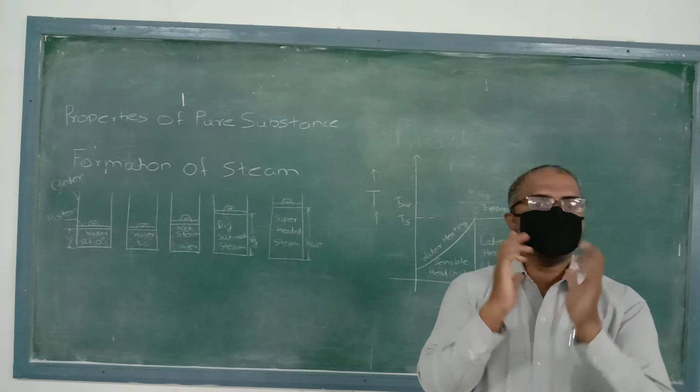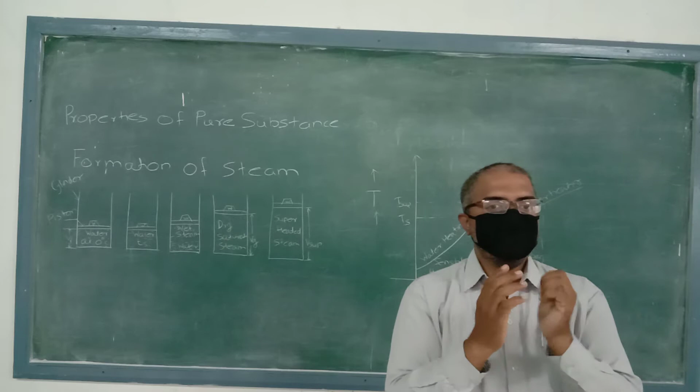First of all, we are going to discuss what is meant by pure substance. Pure substance means it is a substance which is homogeneous in composition, homogeneous in chemical aggregation, and invariable in chemical aggregation. It does not change whenever there is some variation occurred; the chemical composition remains the same.

Now, homogeneous in composition means what? It means that the composition at each part of the system is same as the composition of earlier one.

Homogeneous in chemical aggregation means that the chemical elements must be combined chemically in the same way in all parts of the system.

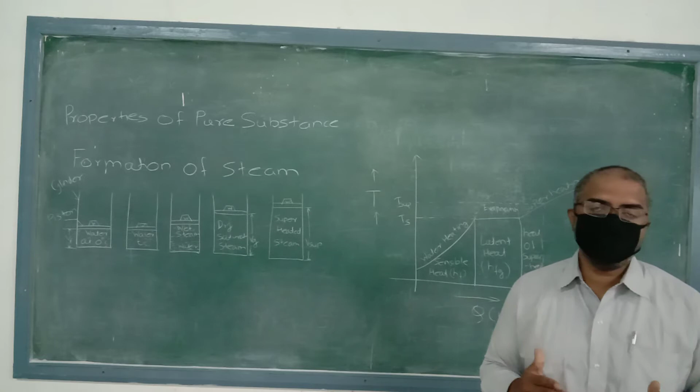Invariable in chemical aggregation means that the state of chemical combination of the system does not change with respect to time. So, three important aspects: homogeneous in composition, homogeneous in chemical aggregation, and invariable in chemical aggregation. These three are the important properties of the pure substance.

So, once again I am repeating: a pure substance is a system which is homogeneous in composition, homogeneous in chemical aggregation, and invariable in chemical aggregation.

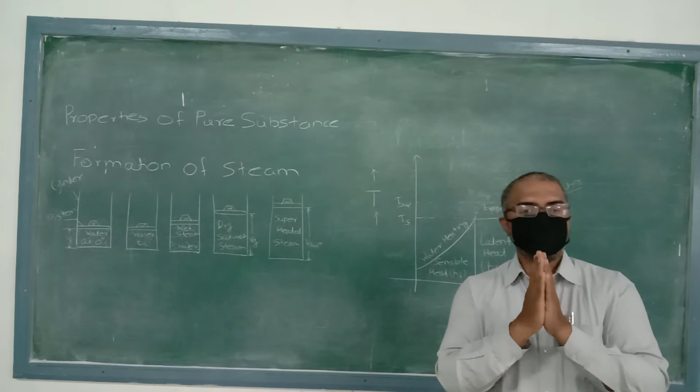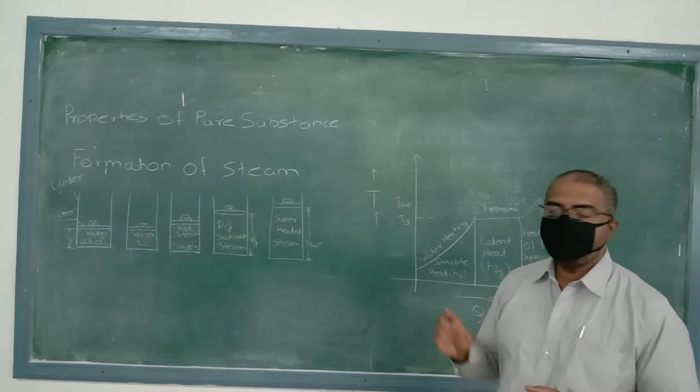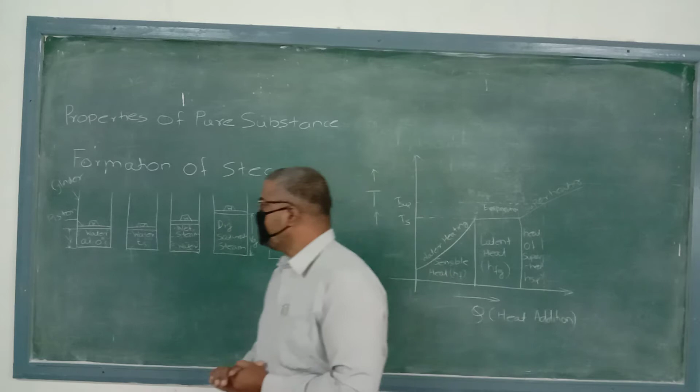Now, next we are going to discuss formation of steam. For this, we are considering the piston cylinder arrangement where the piston is freely moved in upward and downward direction. For this piston cylinder arrangement, we have plotted some diagrams.

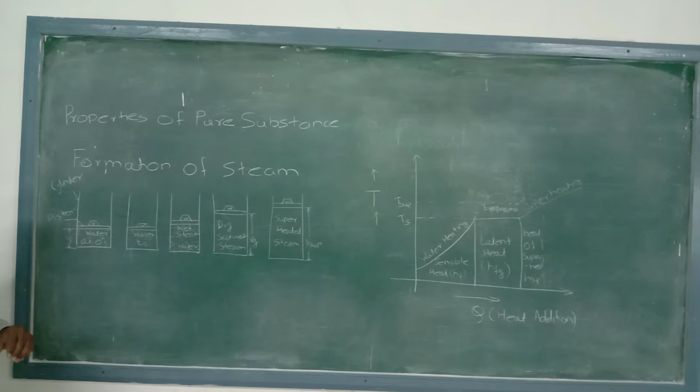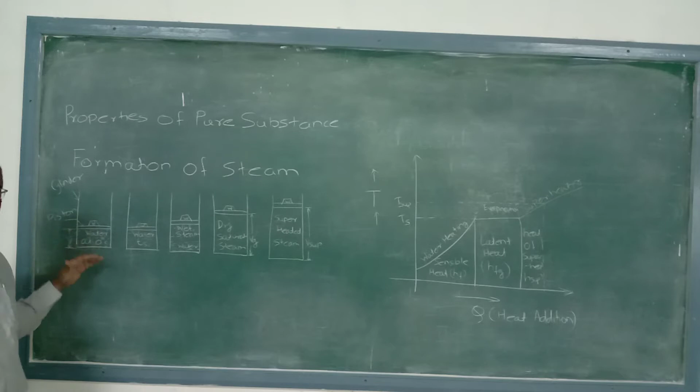In this diagram, we are considering one piston cylinder arrangement where the piston is moving freely in upward and downward direction, and some weight is put on that piston cylinder arrangement. Initially, below that piston there is some amount of water present whose volume is Vf.

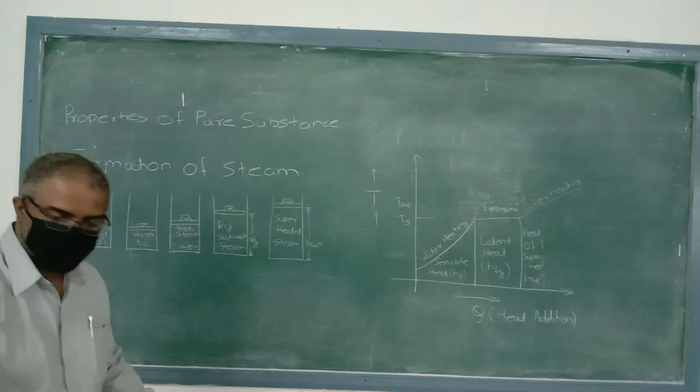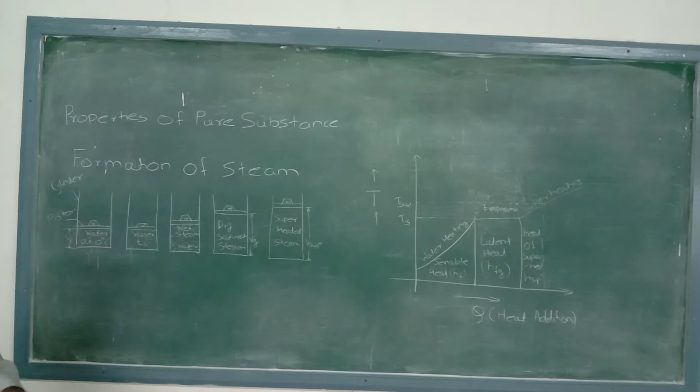Now, we are supplying heat to this water. The water will absorb heat up to 100 degrees Celsius. Due to the absorption of heat, the temperature is moving towards Ts, and this Ts is the saturation temperature of that water.

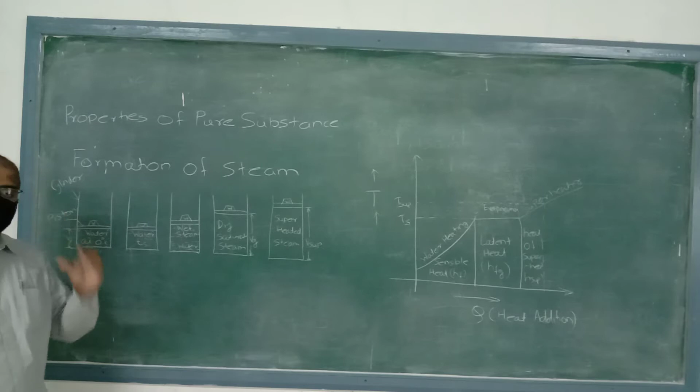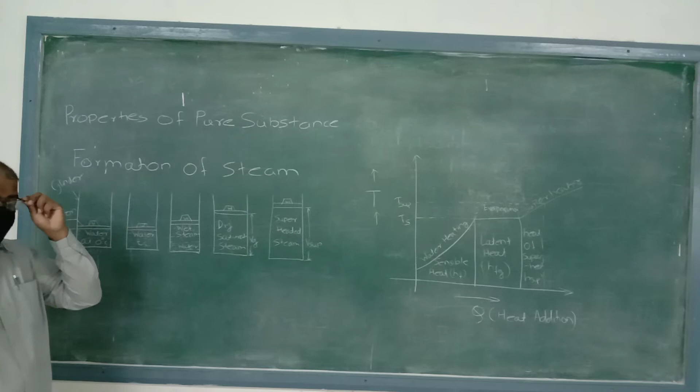Whatever heat is absorbed by the water at 100 degrees Celsius, that is the saturation temperature we achieve due to that heat absorption. So the water is absorbing heat and its heat absorption level is full, so that water is also known as saturated water.

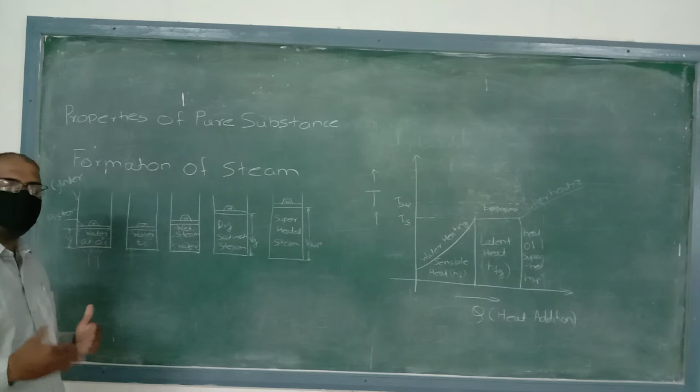After that, we again continue the supply of heat. The water is converted into wet steam, meaning vapor formation is started which will be converted into the wet part. So this wet steam formation is started.

Next, again we continue the supply of heat, and this wet steam is converted into dry steam. In the wet steam there is moisture content; in the dry steam there is no presence of any kind of moisture.

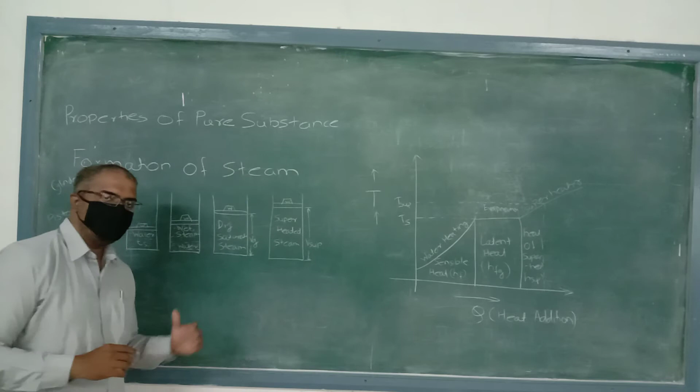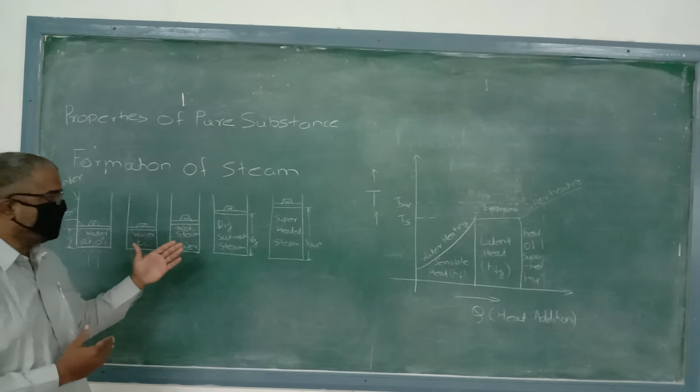So dry steam, you can see here, Vg is the dry steam. So this is the dry steam and this is the pure water. Suppose you have to find the amount of wet water, or moisture conversion, you take the difference between the dry saturated steam and Vf.

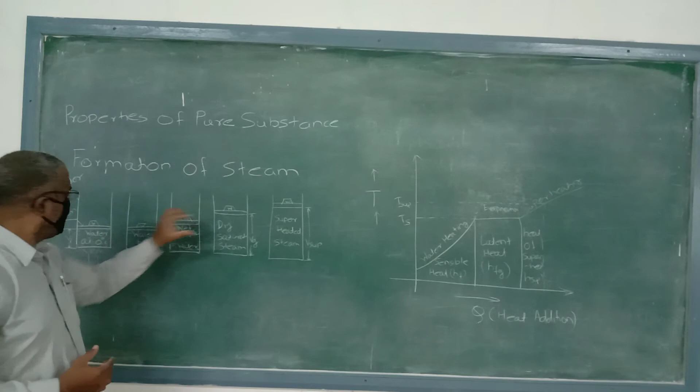This indicates the portion of Vg minus Vf in the dry saturated steam region.

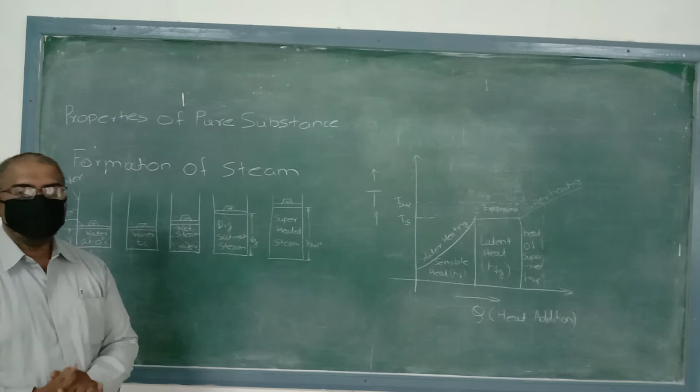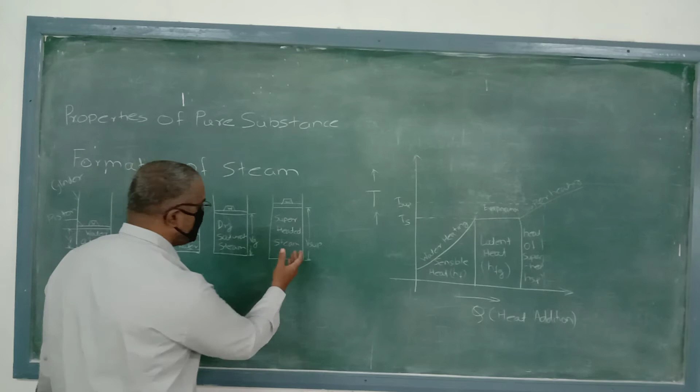Now again we are continuing the supply of heat. Then dry saturated steam is converted into superheated steam, and we are denoting the volume of superheated steam with V super.

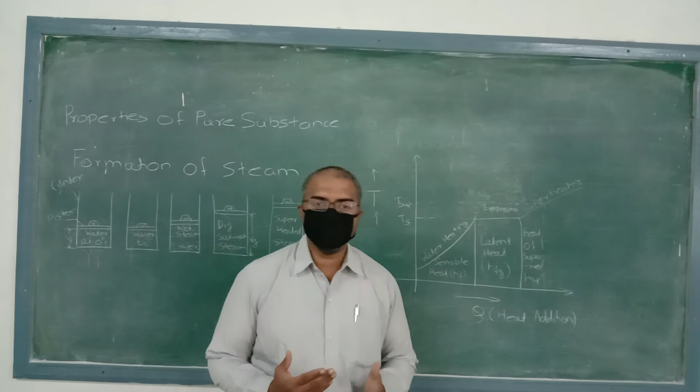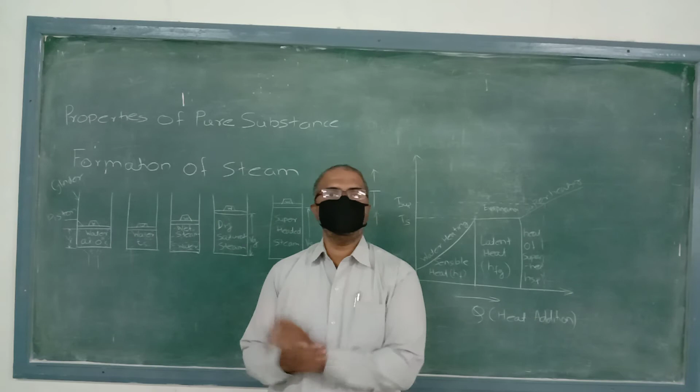So we have discussed the formation of steam. First, 0 degree Celsius water we have taken, then we supply heat to that water. It is converted into saturated water, and after saturation water there will be steam formation takes place, with moisture present in that steam—that is the wet steam formation.

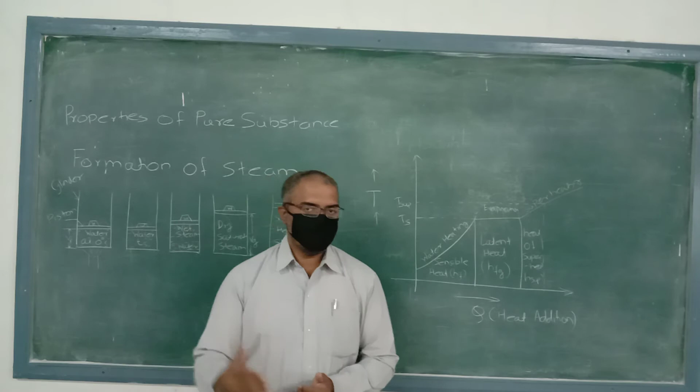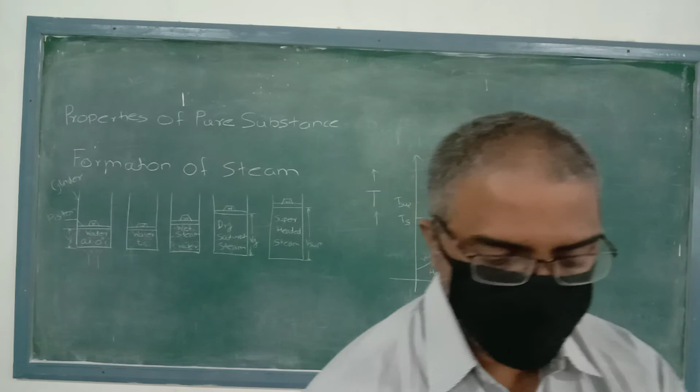After that, again we continue the heat supply. That wet steam is converted into dry steam, and again we supply heat. This dry steam is converted into superheated steam. So this is the steam formation we are getting.

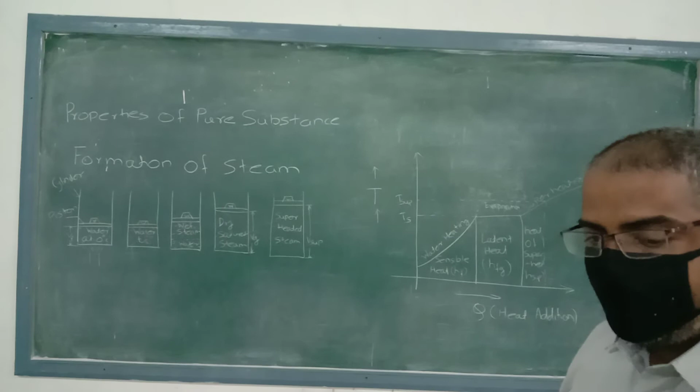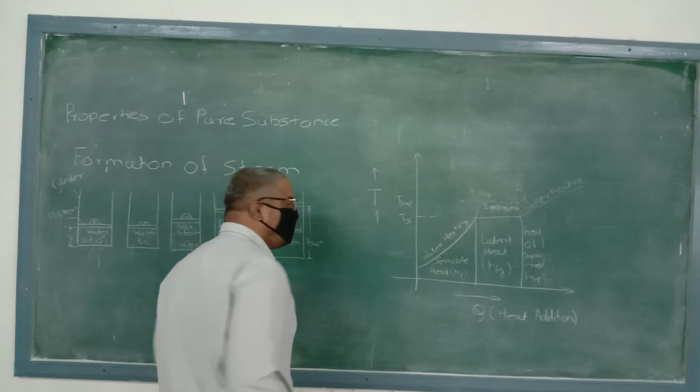Now suppose we are plotting that steam formation on the T-S plot, T-Q plot. T is the temperature we are considering on the y-axis, and Q is the heat addition we are considering.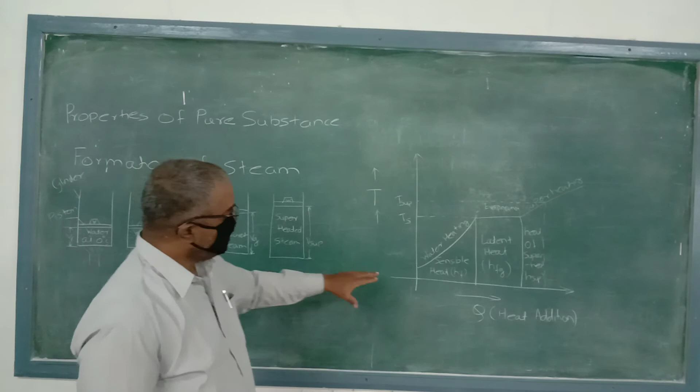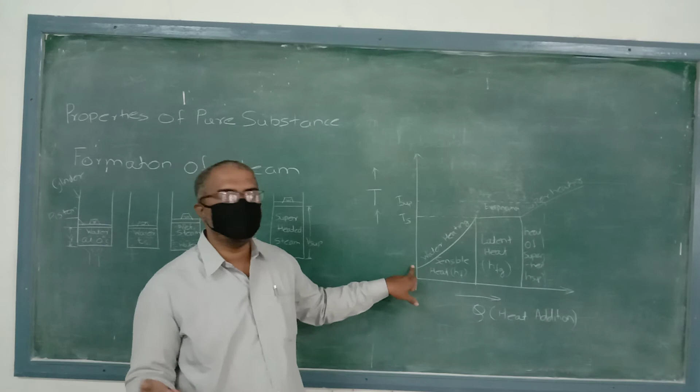We are taking water not at 0 degrees Celsius, because water had certain temperature. So we are considering it at 25 degrees Celsius or 20 degrees Celsius, and supplying heat up to 100 degrees Celsius. We have plotted the graph on the T-Q plot.

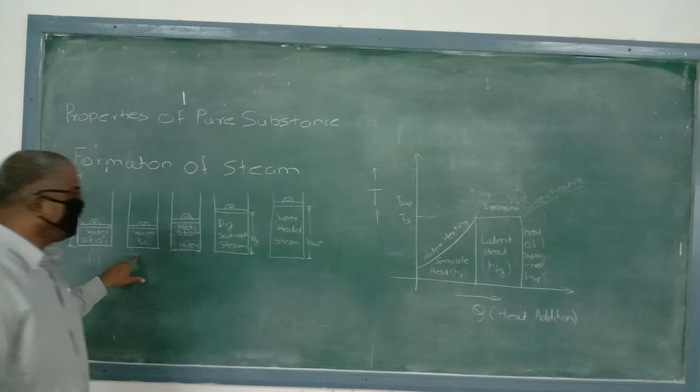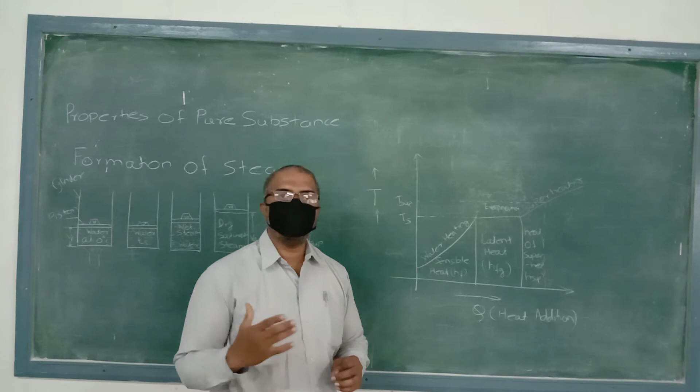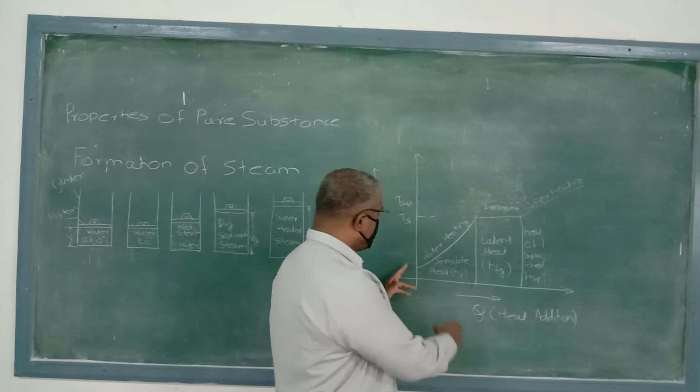So we got this saturation point, TS. When water is at saturated level, we get this point, meaning the total capacity of water to capture heat is full. Now, the amount of heat supplied up to the saturated point is known as the sensible heat, denoted by HF.

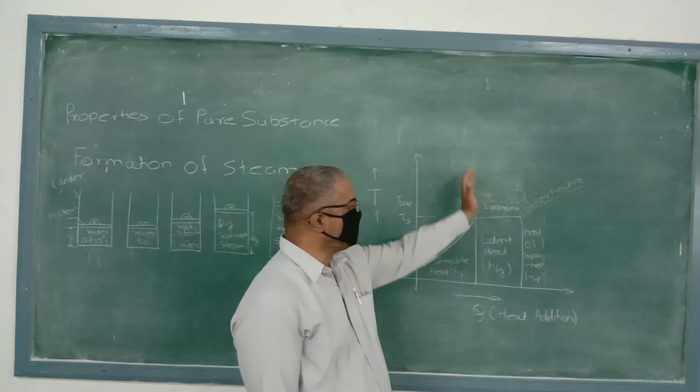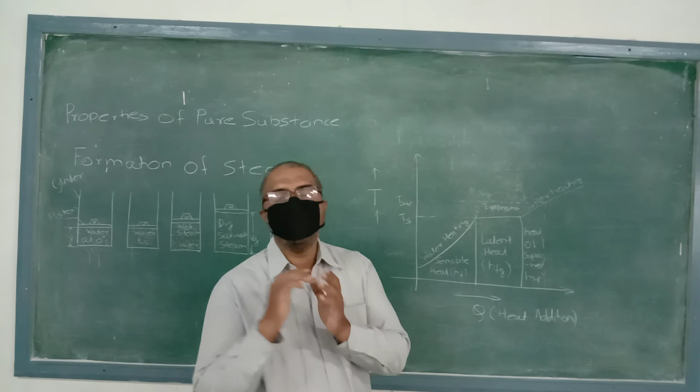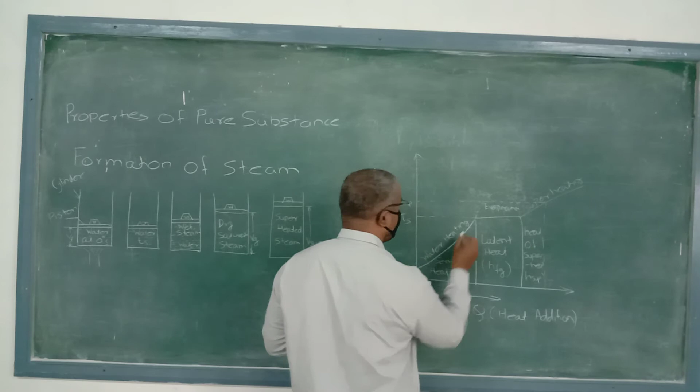Now, the second region is the phase transformation, where 100 degrees Celsius water is converted into steam, that is, dry steam. You can see here there is a water region, but during this phase transformation there is no temperature rise. Whatever heat is supplied is utilized for phase transfer, converting 100 degrees Celsius water into 100 degrees Celsius dry steam. During this region, the amount of heat given is called the latent heat.

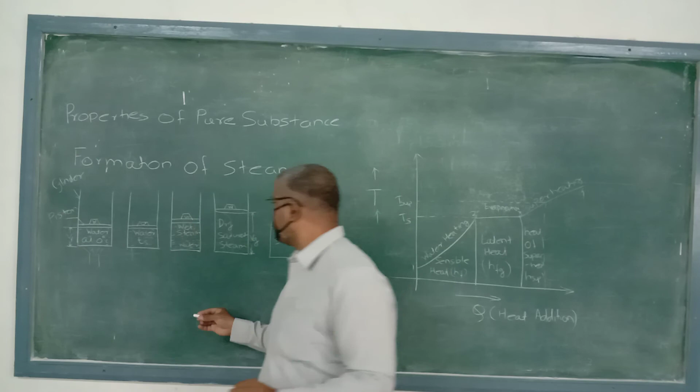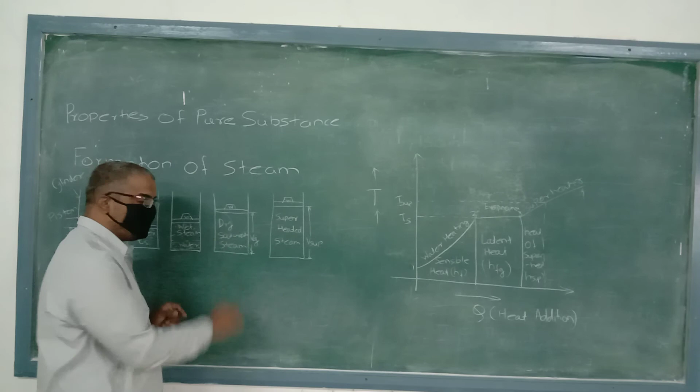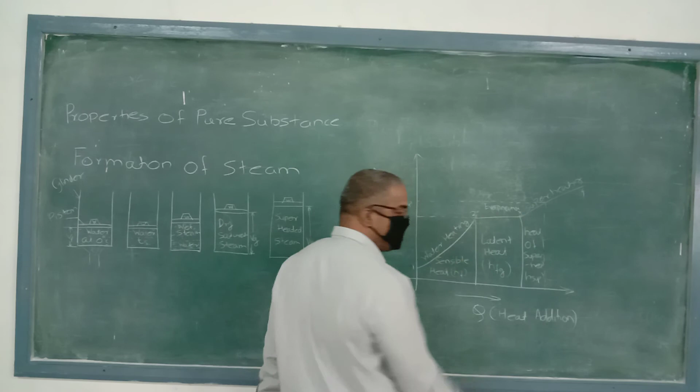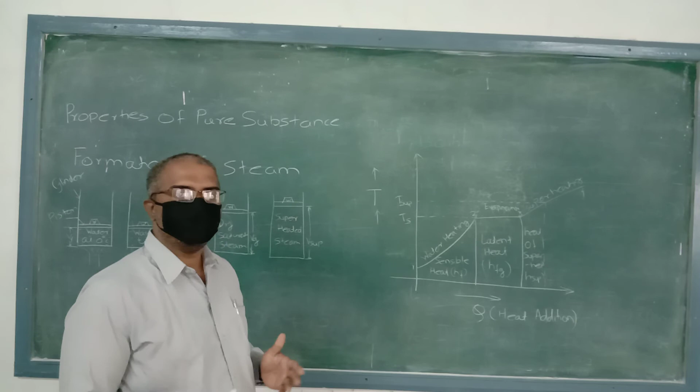Now we have seen the latent heat, temperature is not rising, only phase transformation takes place. During this, wet steam is converted into dry steam, or saturated water is converted into dry steam. This wet steam region lies between these points. It is the composition of moisture content and some part of dry steam. At point 3, we find total conversion of water into dry steam.

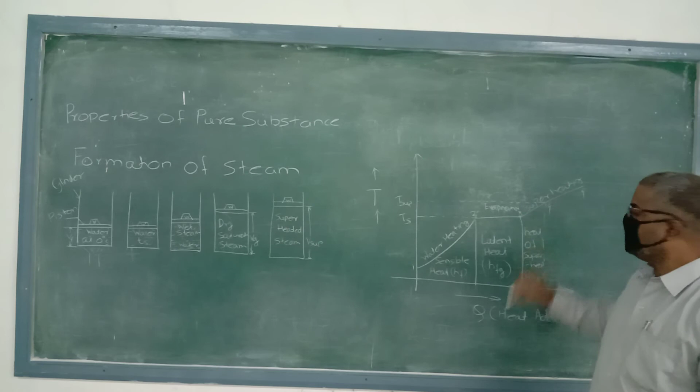If we again supply heat, from point 3 to 4, this is the superheated region, and that amount of heat supplied is known as the heat of superheat, denoted by H super.

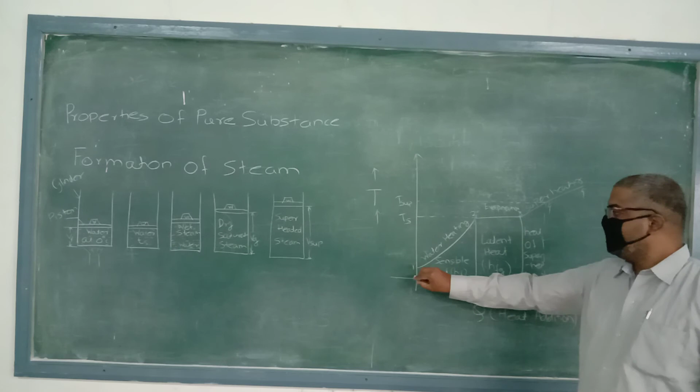We have discussed sensible heat: some heat converted into 100 degrees Celsius water. Next, the 2 to 3 region: 100 degrees Celsius water converted into 100 degrees Celsius dry steam is the latent heat, denoted by HFG. Beyond that dry steam, again we supply heat, and that steam is converted into superheated steam; that heat is known as heat of superheat, denoted by H super.

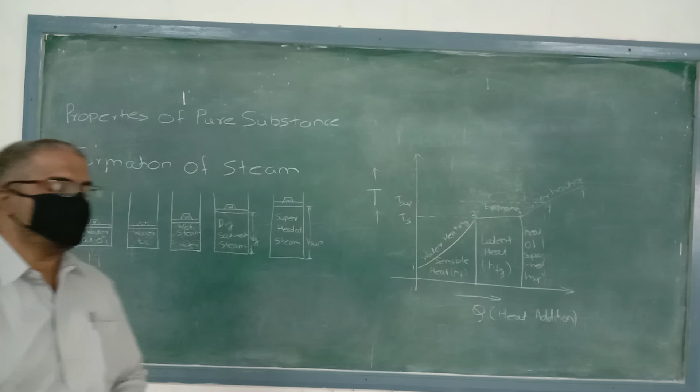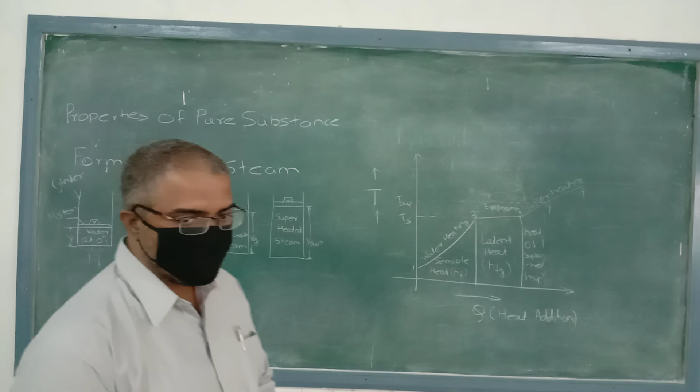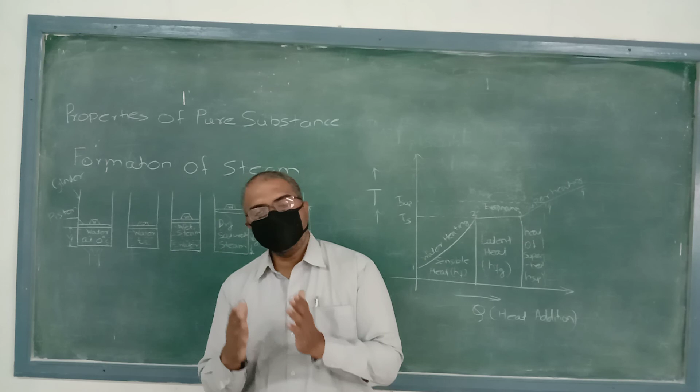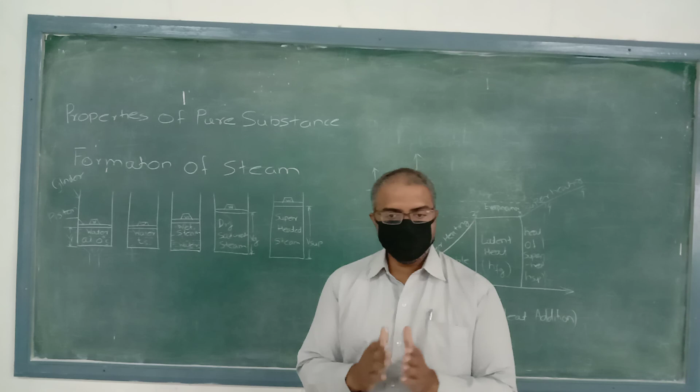So today we have discussed 3 points: properties of pure substance. We discussed what is a pure substance: a substance where the composition remains the same, which is homogeneous in composition and in chemical aggregation, and invariable in chemical composition or chemical aggregation over time. So a pure substance is a system that is homogeneous in composition, homogeneous in chemical aggregation, and invariable in chemical aggregation.

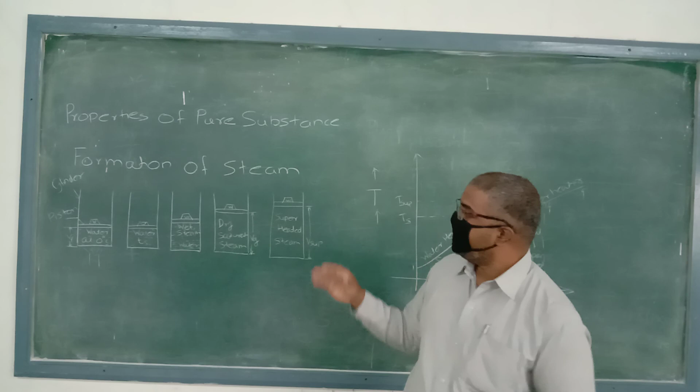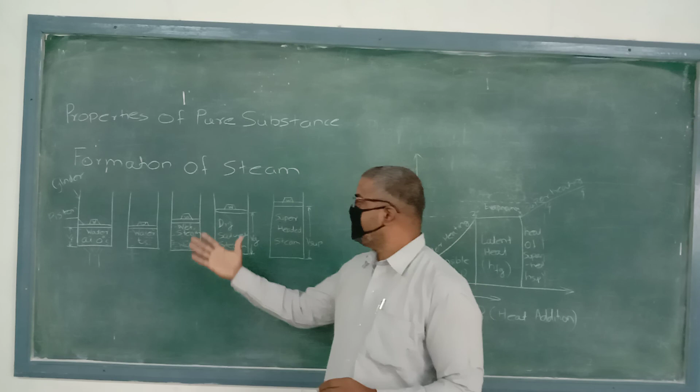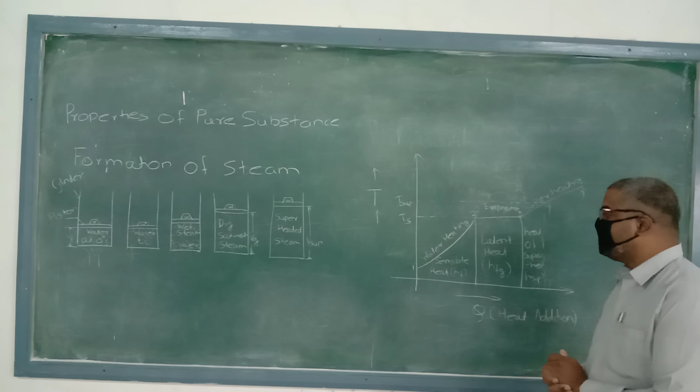After that, we saw the formation of steam. Using a piston-cylinder arrangement, we supplied heat and saw how water is converted into superheated steam. Then we plotted heat addition against temperature change, and in this region we discussed sensible heat, latent heat, and heat of superheat.